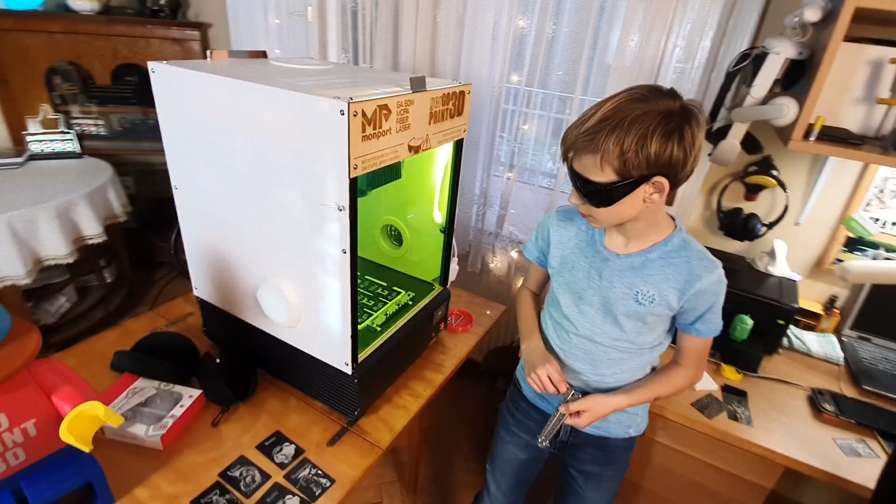You've seen the teaser, and now the project is here. We are diving into a multi-tool DIY build that mixes unexpected materials like repurposed election posters with 3D printing from our Sovol, FLSun, and Creality machines, alongside laser cutting on our large 600 by 600 diode and CO2 lasers.

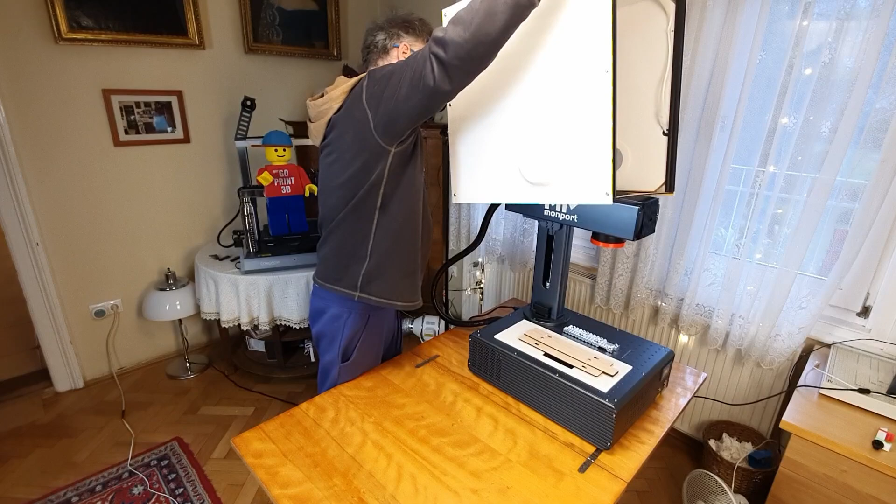The goal? To create a dedicated safety enclosure for our Monport GA60 fiber laser. Instead of buying a pricey commercial box that would increase its footprint, I designed a resourceful solution using affordable parts sourced from AliExpress. Join us as we walk through creating this enclosure, effectively trapping fumes and containing beams to make our powerful MOPA laser much safer to use.

Even if you don't own a fiber laser, you might pick up some fun and generally applicable techniques for using unconventional materials and combining different fabrication methods in your own projects.

Speaking of our laser adventures here on the channel, the Monport GA60 has already featured in a couple of videos. You might remember seeing it first in this video, which served as a tutorial guiding first-time users through the unboxing and initial setup, along with our first impressions of it. We then used it in a practical project featured in this other video, where we combined the GA60 for engraving stainless steel spice jar lids with our Monport Onyx R55 CO2 laser for the glass jars.

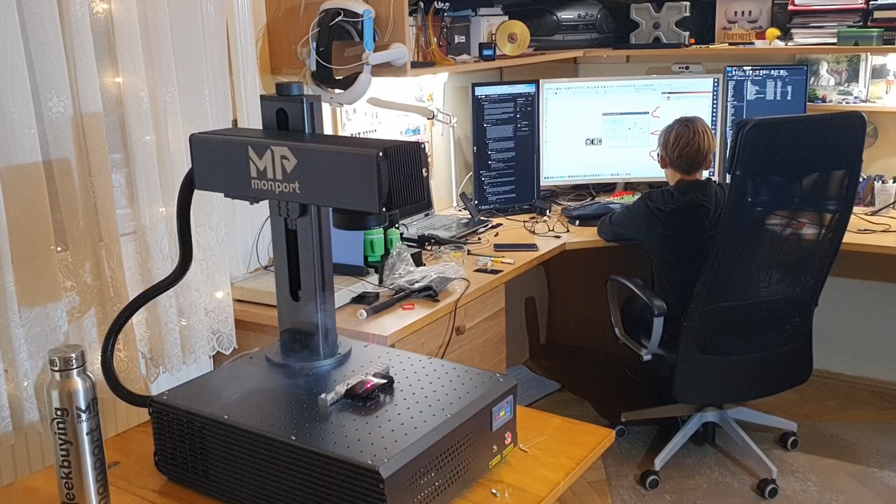So why did I decide to build an enclosure for the GA60 in the first place? Well, while fiber lasers like this do come with eye safety glasses, and you really need one for every person and pet that may step into that room, they typically arrive without any built-in ventilation and have a fundamentally open structure. That means effectively dealing with hazardous fumes and ensuring beam containment is completely up to you.

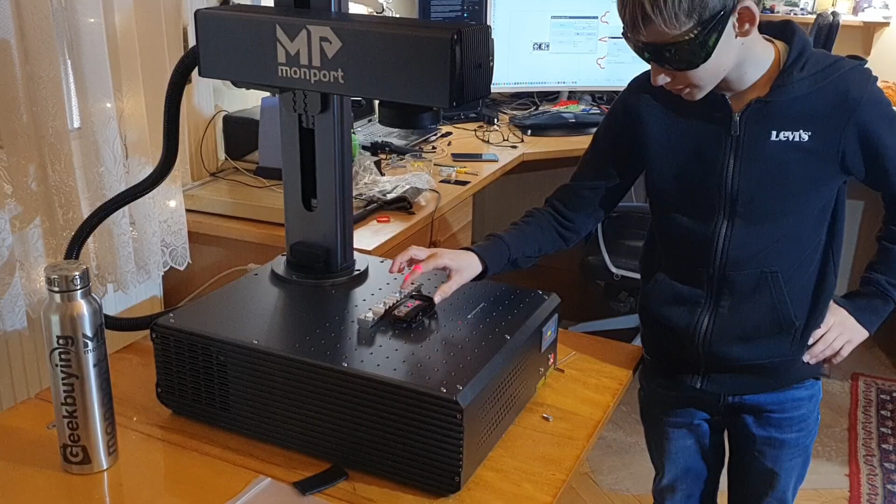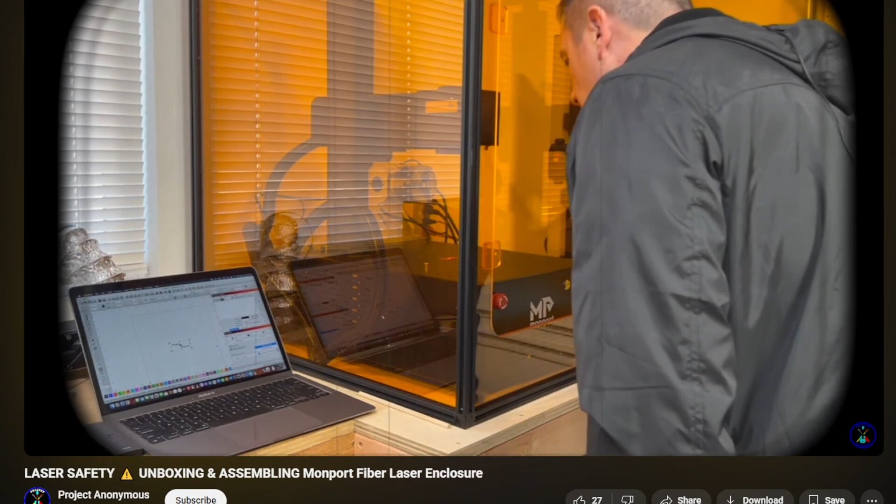I looked at commercial enclosures, of course, but I found they are often quite pricey, easily $500–600 or more, plus shipping. Beyond the cost, they usually wrap generously around the machine, drastically increasing the overall footprint, at least doubling or tripling the space needed. They also tend to use expensive colored safety plexiglass all around, adding unnecessarily to the price. And even then, you still have to buy and set up your own ventilation fan and ducting. For us, that didn't quite fit our needs nor our budget. So I decided to design and build our own custom solution.

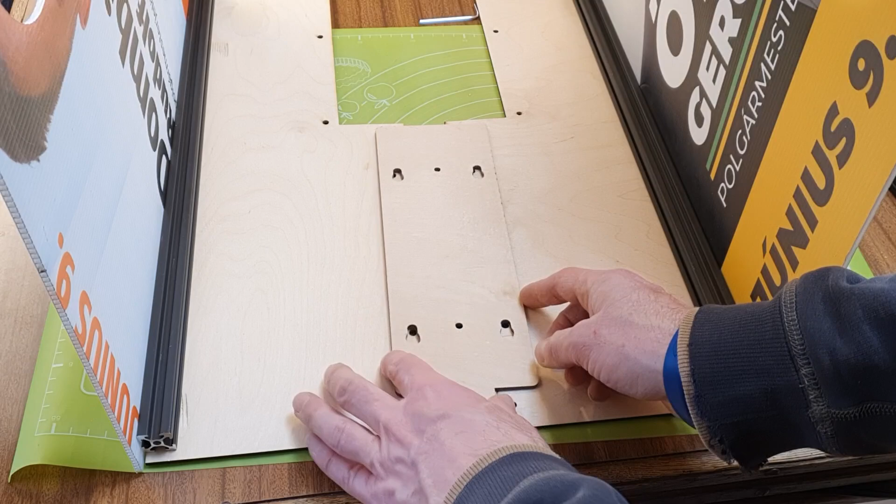By going the DIY route, I could create something that achieved essential safety, trapping fumes and containing the beam, but with some key benefits that were important to us. A tight fit that doesn't increase the GA60's footprint. Full access to things like autofocus, flexibility with dual-side venting, and lightweight design. This build involved combining laser cut panels with custom 3D printed parts designed to be printable on virtually any FDM printer using minimal filament, though getting your clearances right is important for assembly.

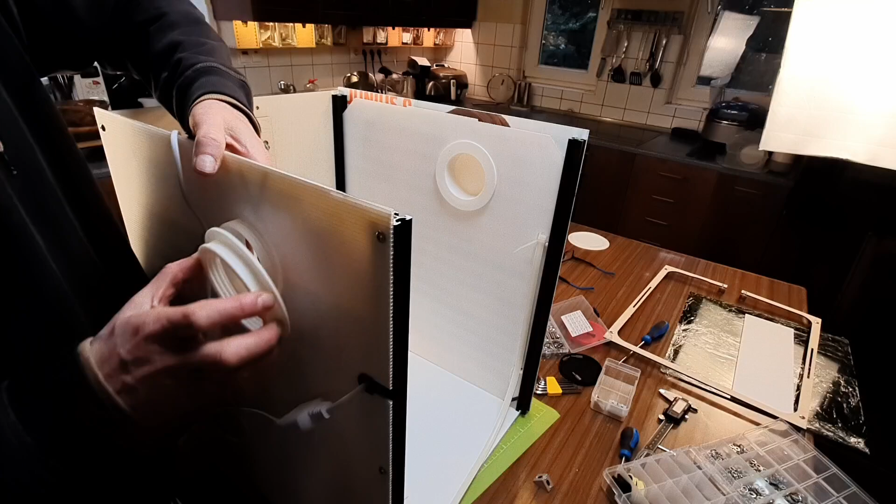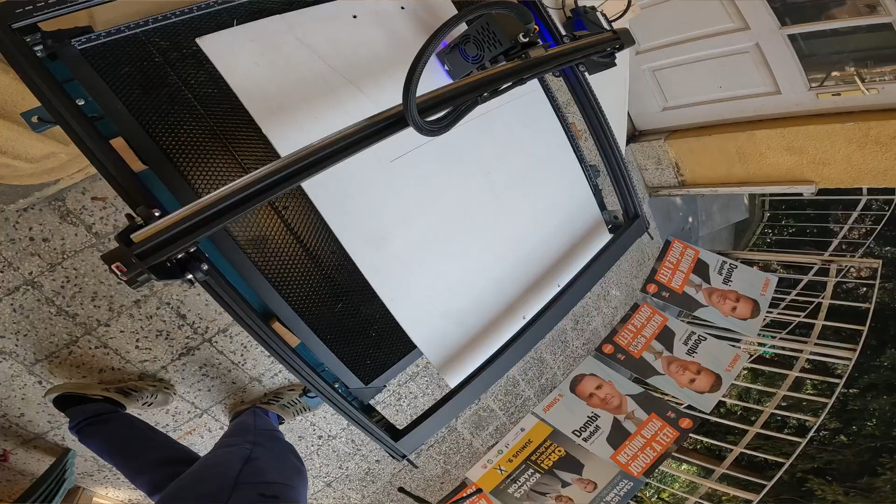And of course, cost was a major driver. I estimated the main components and materials came in around $100–120, a massive saving compared to those commercial options. Just note, this price doesn't include the inline fan or exhaust hose, because commercially available enclosures typically don't include those either. As for the time, assembly took us about 2–3 hours after everything was cut and printed. My large diode laser spent about an hour laser cutting each of the 7 main panels, but honestly, these could also be hand cut if you're up to a bit more effort.

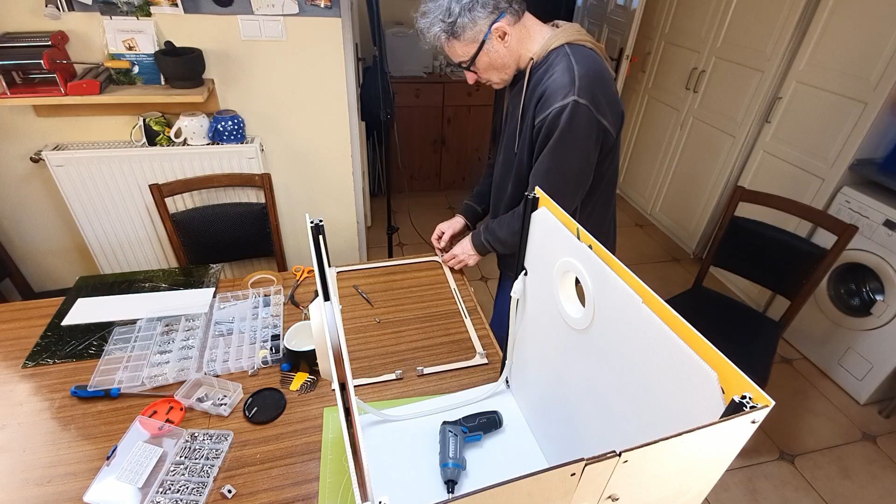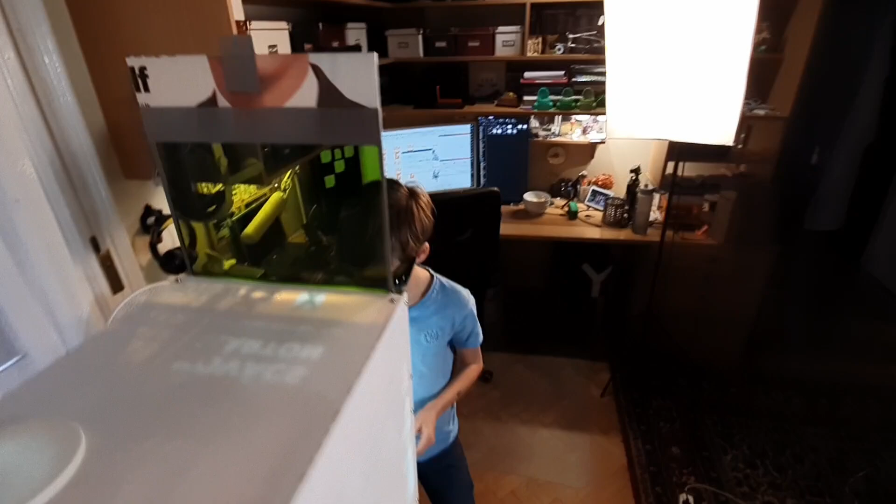So what exactly do you need to build this enclosure? I started with materials many DIY workshops might already have lying around. The largest volume material was corrugated sheets, repurposed from old election posters I collected after the elections last year. Basically free. I doubled up these sheets for the walls mainly to try to hide the poster graphics, though you'll actually see later that with the light inside, they will still show through a bit. It's actually nice to see opposing parties work together for safety here.

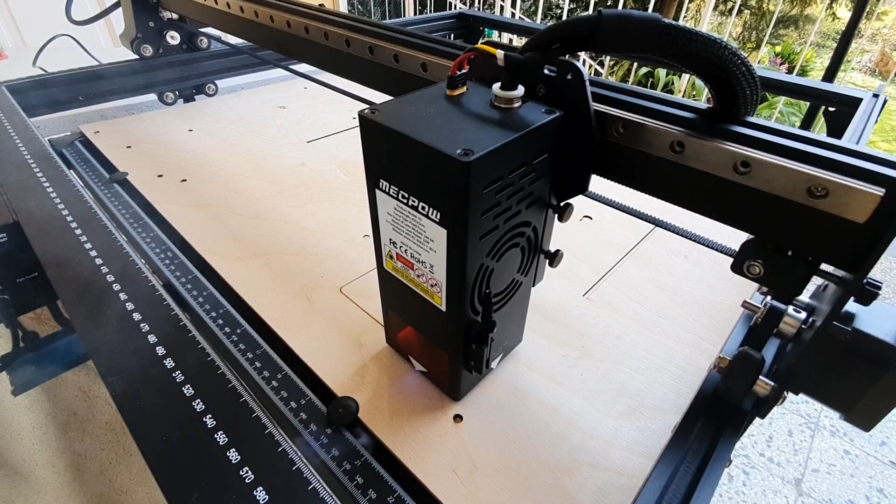As an alternative to the corrugated posters, you could easily use thin plywood for these sides and top panels instead. If you use plywood, they are stronger too. You likely wouldn't need to double them up. I also used some thicker scrap 4-5mm plywood we had for the base, back, and front top frame pieces, and a bit of duct tape, another workshop staple, and under 300 grams of cheap PLA filament for the 3D printed parts I mentioned earlier.

And that covers a good portion of the build. For the structural components and features, we sourced everything from AliExpress. This included 4 2020 extrusions for the corners, about 20 corner brackets with T-nuts, and all the necessary screws. We also got a safety window, specifically polycarbonate for laser safety, a bright COB LED strip for lighting inside, and an inline fan for the crucial ventilation system.

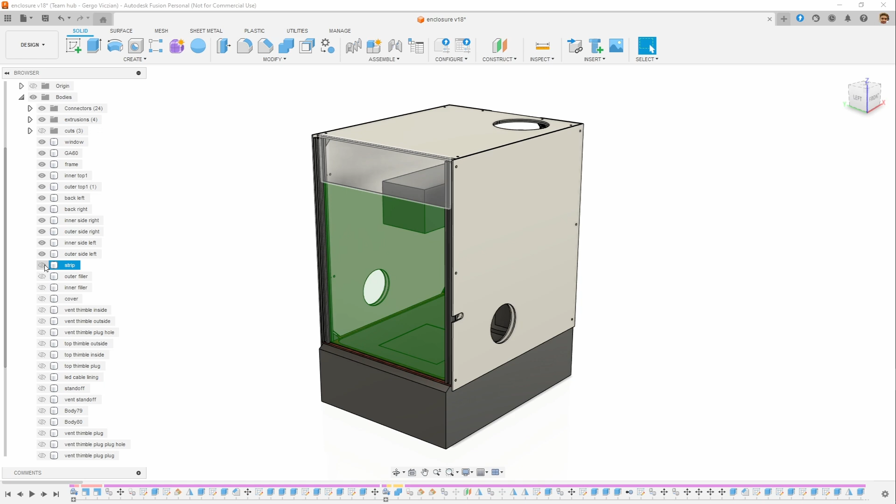Now about how this enclosure came together design-wise. As you might have noticed in some of the earlier background shots, the initial modeling and planning all happened in Autodesk Fusion. Laying everything out digitally and seeing how the components were supposed to fit together is one of the most satisfying parts of a project like this. From Fusion, it was over to Lightburn to generate the precise cut patterns for the main laser cut panels.

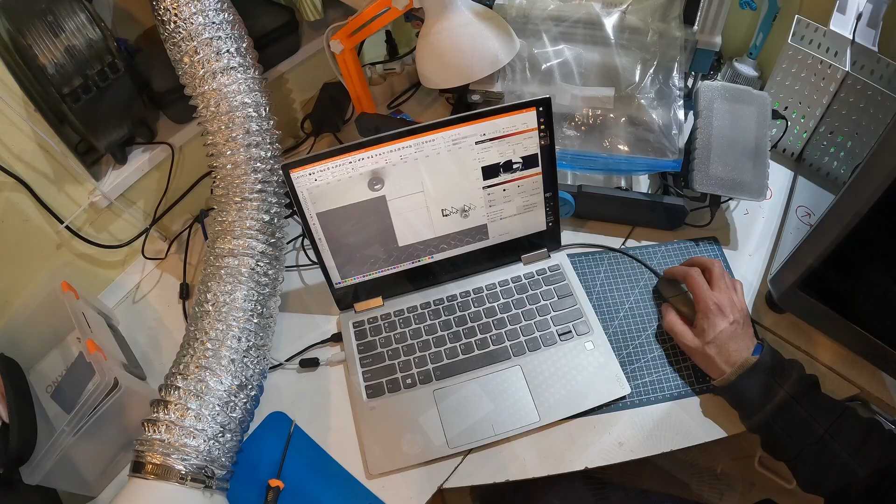Honestly, I was incredibly lucky. Almost everything actually fit perfectly right on the very first attempt in real life. There were just a few small components that needed minor adjustments during the assembly process, but thankfully, these didn't require recutting or wasting any material. And of course, I've made sure to update the published models with these necessary tweaks. So if you're looking to build this yourself, all the design files are available for you.

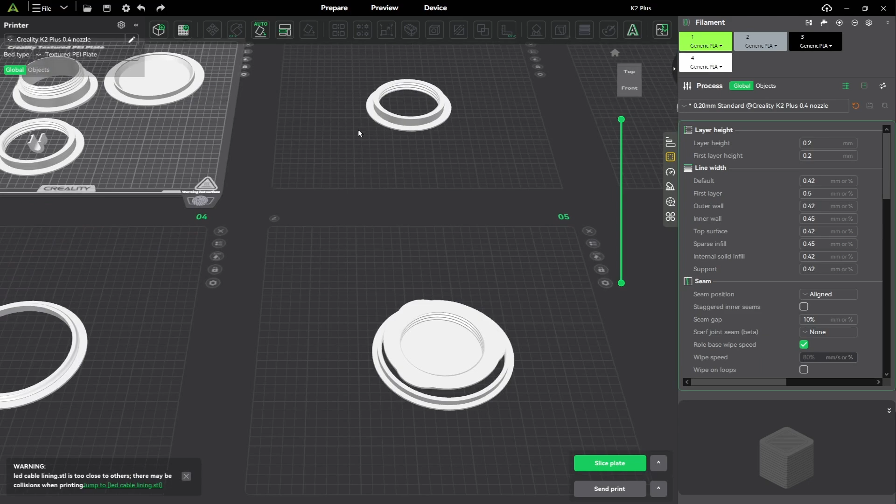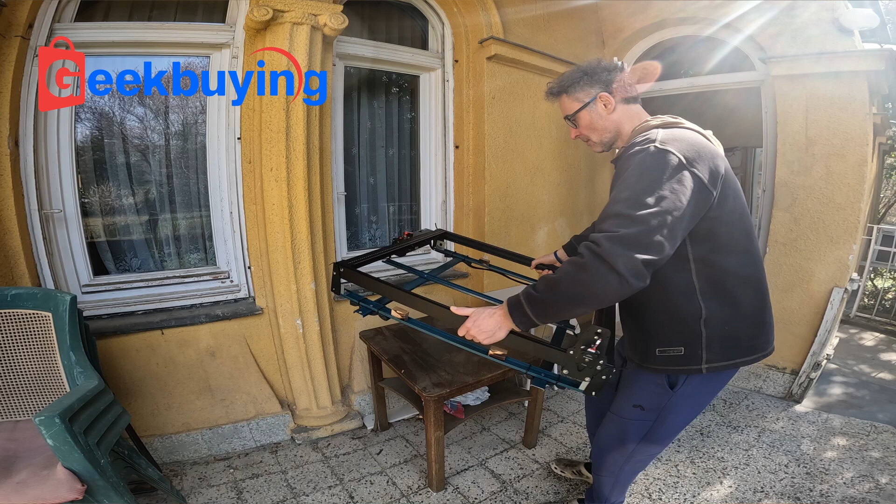First up, preparing the panels. I cut the main pieces on our large 600 by 600 millimeter Mecpow X5 22 watt diode laser, that open frame machine from geekbuying.com that we usually use out on the porch. Our review video covers this laser in detail if you're curious.

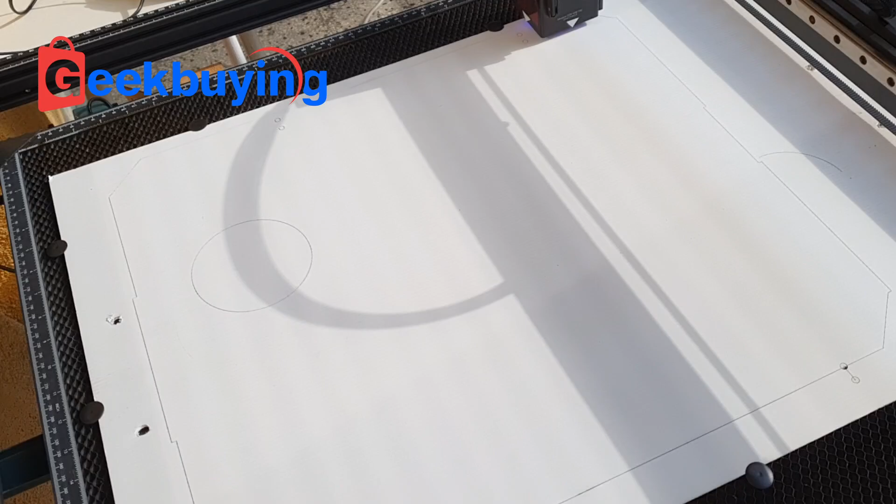Cutting corrugated plastic like these election posters was actually pretty tricky because of the double layer and the vertical walls inside. It really needs very slow, quite high power passes. And a super important tip here is to use your air assist at its highest setting to stop those plastic fumes from fogging up your lens. And this material is likely toxic, so ventilation or fume extraction is really essential.

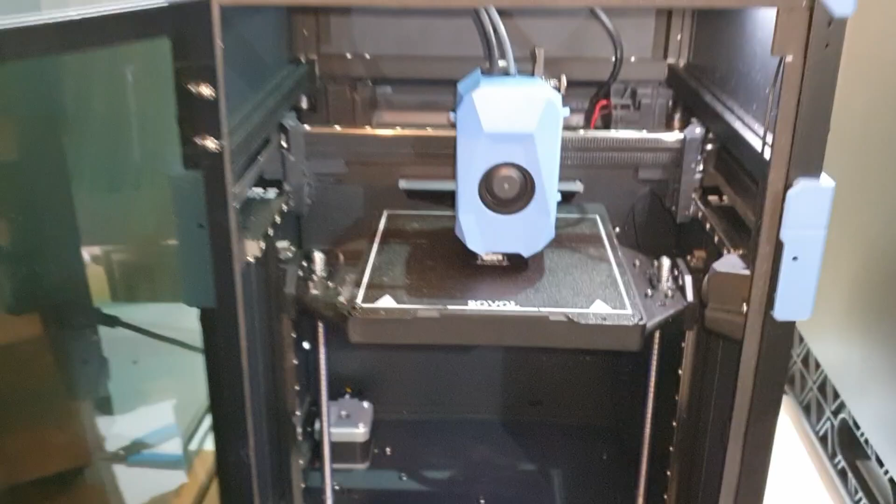While I was laser cutting those panels, I was also fabricating the 3D printed components in parallel. These included pieces like the venting duct adapters or connectors, spacers, and cable lining. I initially tried printing the adapters on our Flsun S1 Pro. Man, that printer is incredibly fast. My review covers this unique Delta Motion machine if you want to check it out.

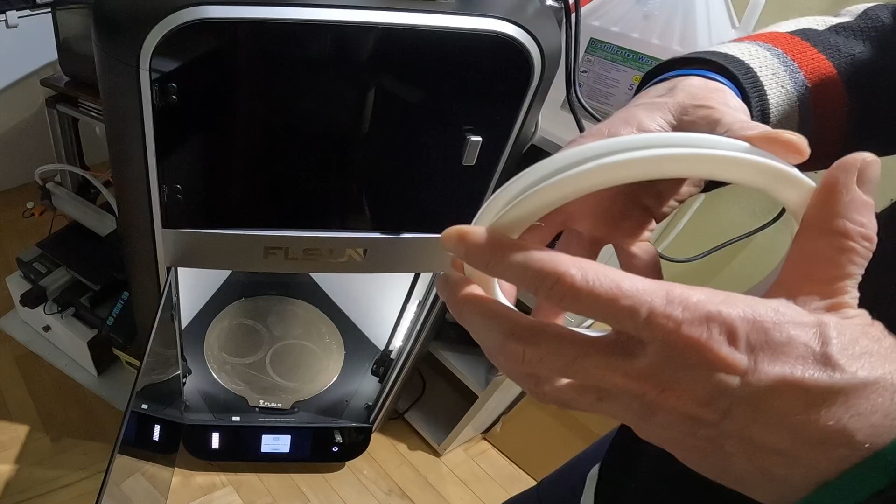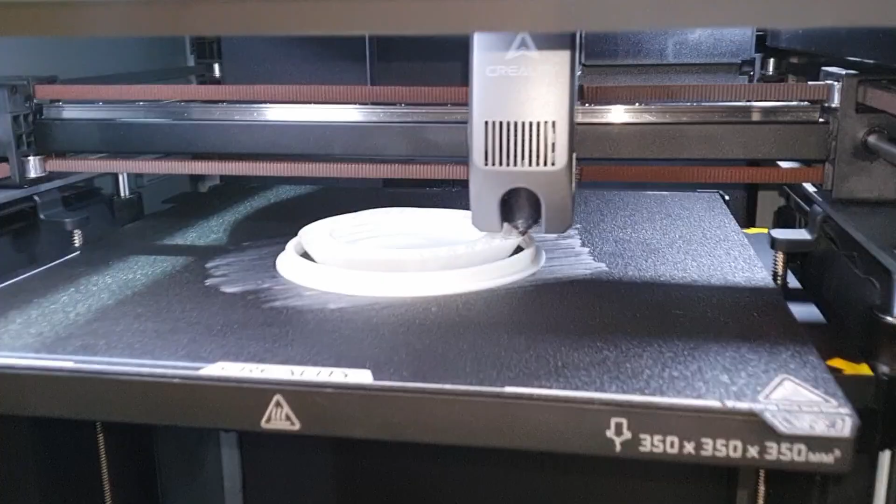However, these initial prints had some clearance issues. While I tried my usual boiling water trick to help them fit in a softened state, the best path forward was just to reprint them using the then new K2+. It just doesn't have the subtle dimensional accuracy challenges sometimes intrinsic to Delta Motion systems like the S1 Pro. But honestly, you don't really need huge or fast printers for any of these parts.

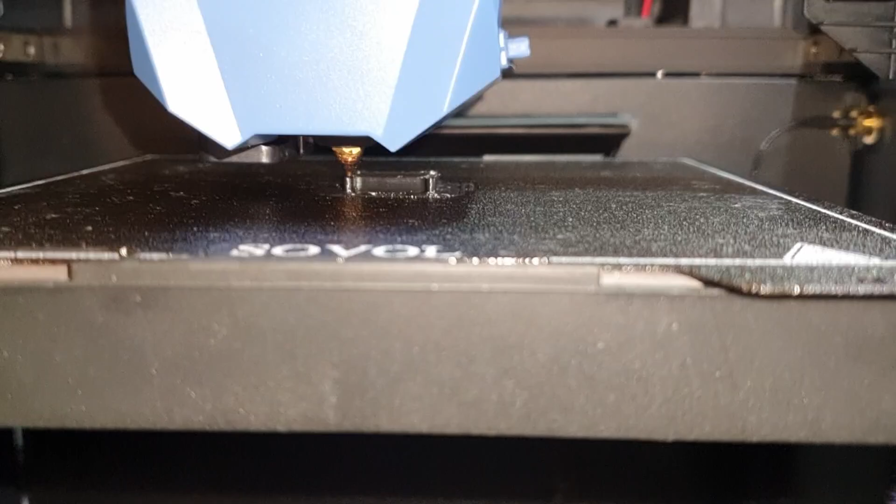And working in parallel for the smaller pieces like the spacers and cable lining, I used my new favorite assistant printer, the Sovol Zero. Its tiny build volume and quick printing speed are perfect for these smaller jobs, making it my go-to for those kinds of side tasks present in any complex project. I reviewed this little workhorse about a month ago if you missed it.

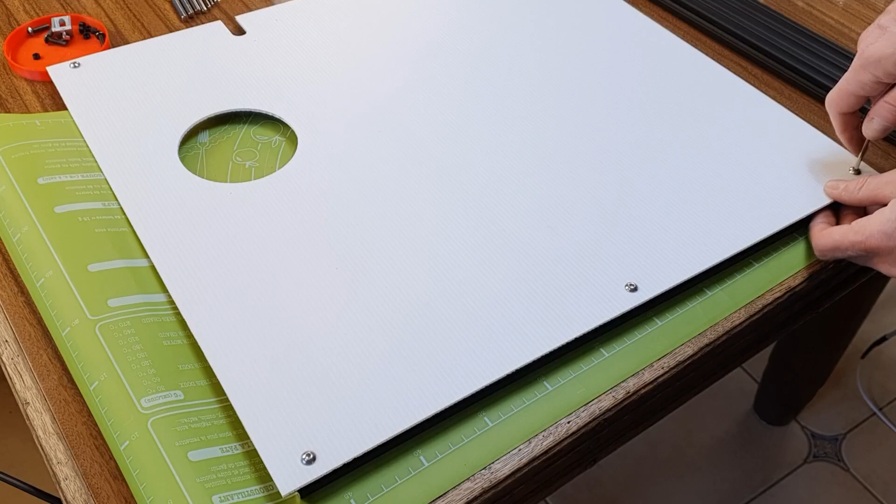With all the parts cut and printed, it was time to put everything together. Assembly started by building the side panel assemblies using 3 M5 screws and T-nuts on each side to secure 2 of the corner extrusions to the panel. I then connected the right half of the 3-piece rear panel to that side assembly. Of course, I did exactly the same for the left side.

Then I could add the third piece with the special locking mechanism in the back to connect the 2 halves of the rear section. This is necessary to work around the fiber cable, which of course cannot be disconnected to install the enclosure. We drive these 3D printed spacers onto the M5x20 screws with the Hoto electric screwdriver. These slide into the keyhole slots I cut in the middle piece of the rear panel, creating a simple yet effective locking mechanism to firmly hold the 2 sides together.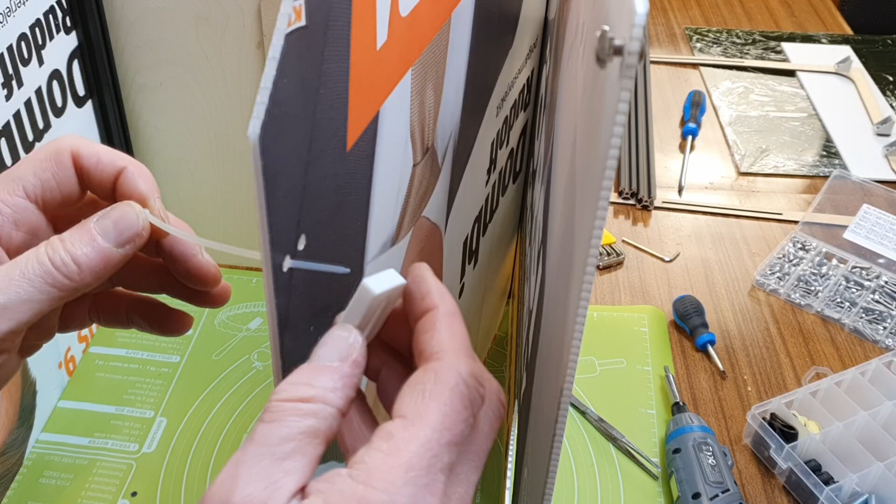Next, I started installing the internal side panels and features. This involved securing the LED strip to the inner piece of the doubled up side panels, using zip ties to hold it in place, and then adding the 3D printed LED cord lining to keep the wires tidy.

After that, I slid the inner walls into position, facing each other, and made sure everything was properly aligned before adding the top. Adding the top panels requires installing the corner brackets first. I quickly discovered the alignment protrusions on these little brackets were in the way and had to be sanded down to fit cleanly, which was easy enough to do with the precision rotary tool HOTO sent us recently.

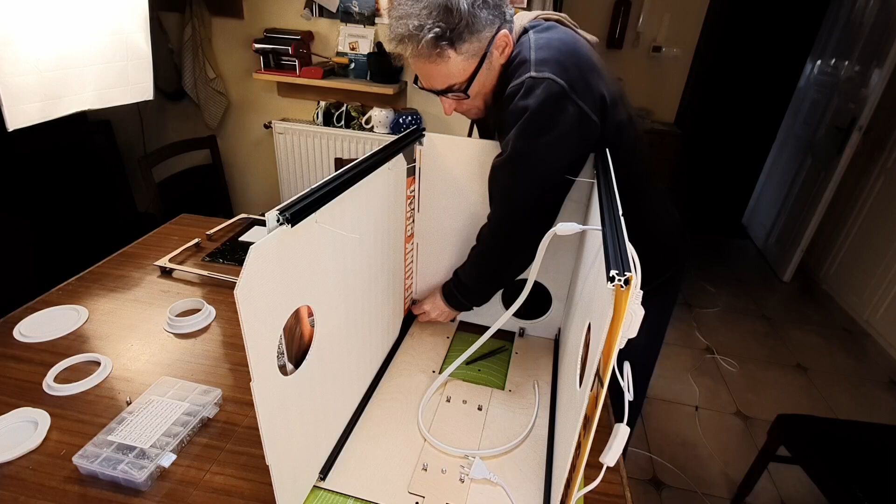Once the brackets were on, adding the top panels was next, which was a little tricky due to the tight angles for accessing some of the screws. After the main top structure was in place, I installed the venting duct adapters, placing the open one on the right side where our ventilation would connect, and placing the covered one on the left side, which makes our design future-proof and allows for having the ventilation from the other side later, if needed.

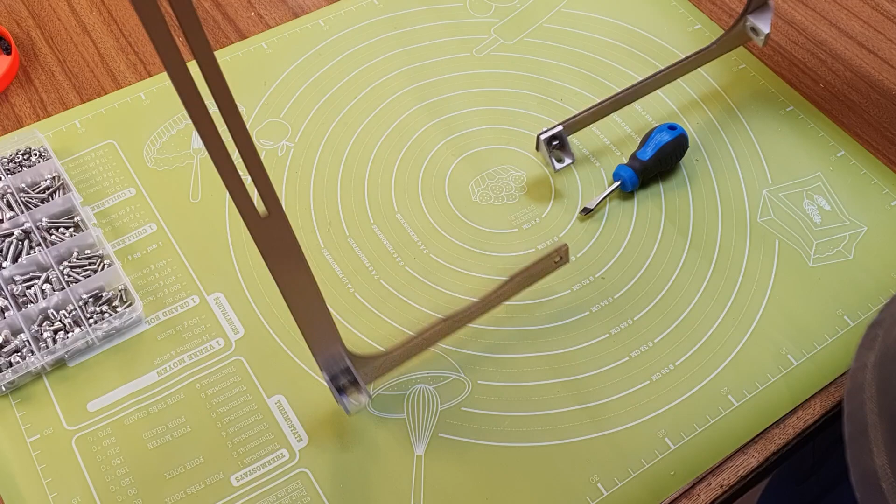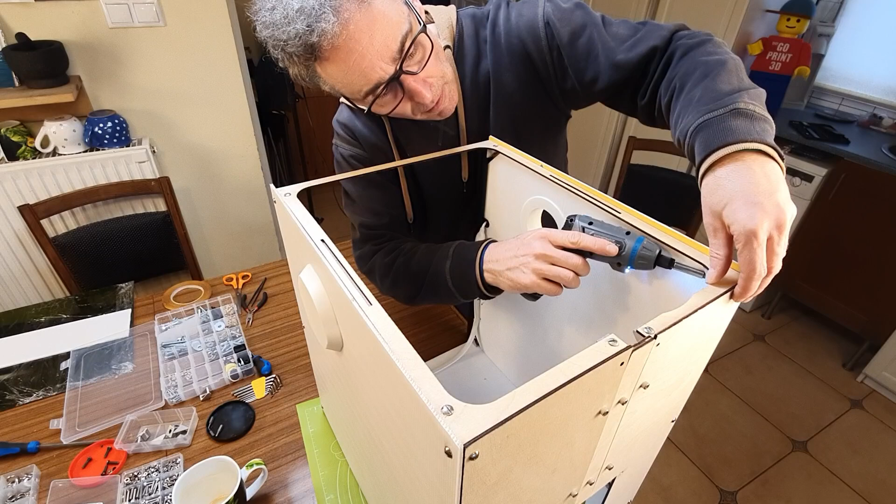With the upper assembly largely complete, it was time to mount it onto the base frame. This base frame is thin, but being cut from the same 4mm plywood as the back panels, it gives a bit of stability to the still wobbly structure at this point. Mounting it on the base frame also starts with attaching 10 corner brackets similar to the top. I noted that these also had the same alignment protrusions that needed a quick sand with the HOTO rotary tool. Once the brackets were in place, I carefully lowered the upper assembly onto this base and secured it using the bottom brackets and the final set of M5 screws.

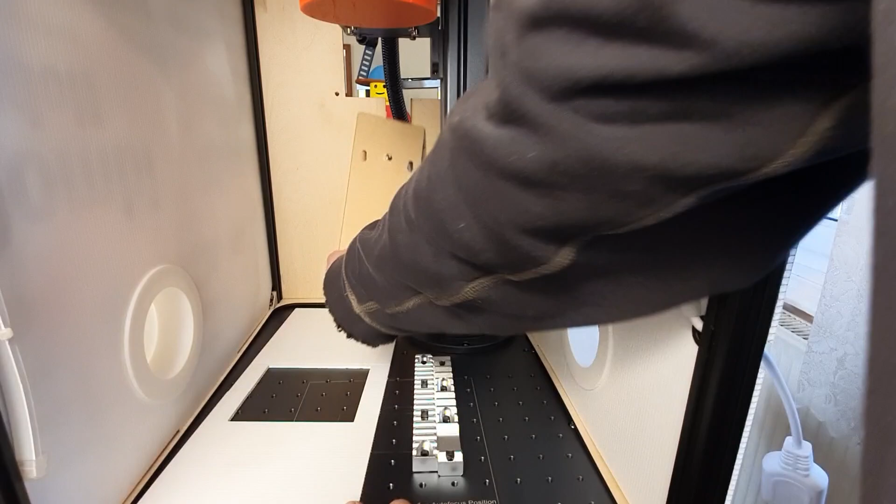Finally, it was time for the moment of truth, installing the completed enclosure onto the Monport GA60 itself. I carefully lifted the enclosure and positioned it over the laser unit. I secured the back section and then had to do a little fine-tuning on the sliding back cover to get a perfect fit around the back of the laser arm. That definitely took a couple of takes to get just right.

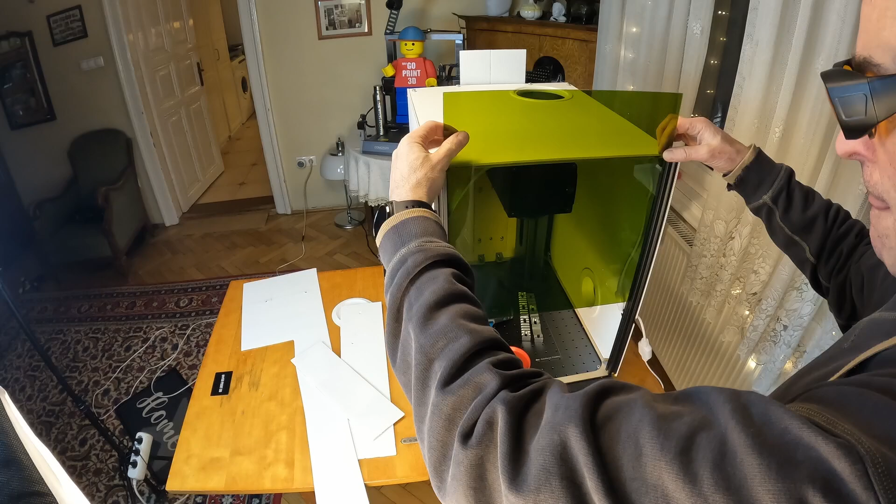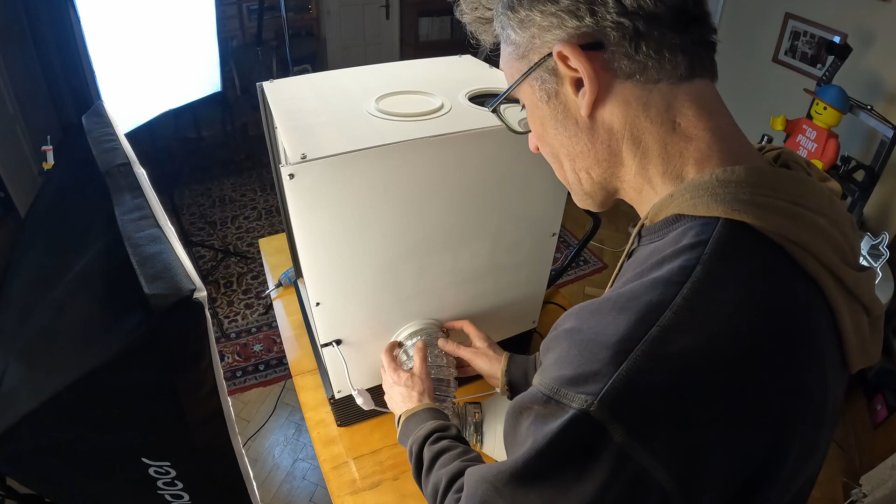The last structural steps were adding the safety window into the front panel. It slides neatly into the grooves of the front 2 extrusions. This was one of my early visions for this project. And then connecting the inline duct fan to the venting adapter on the right side. I also added a simple window stop mechanism, just a drilled hole and a long screw to prop the window up when opened.

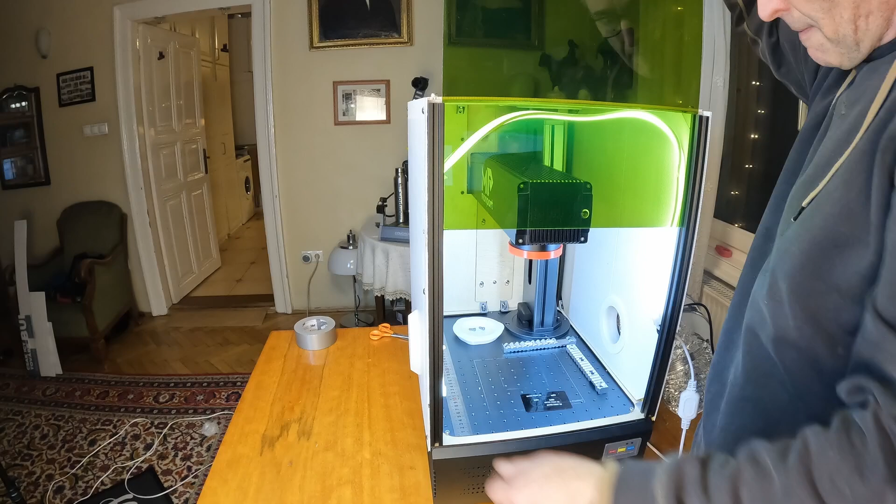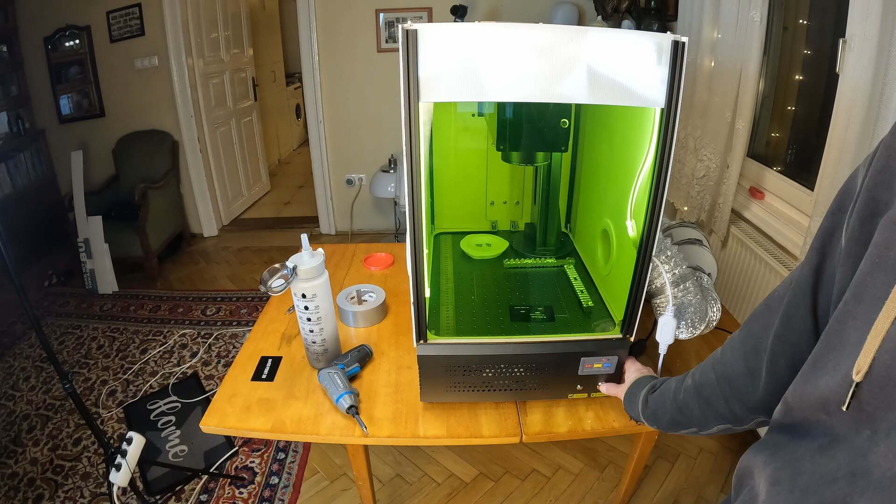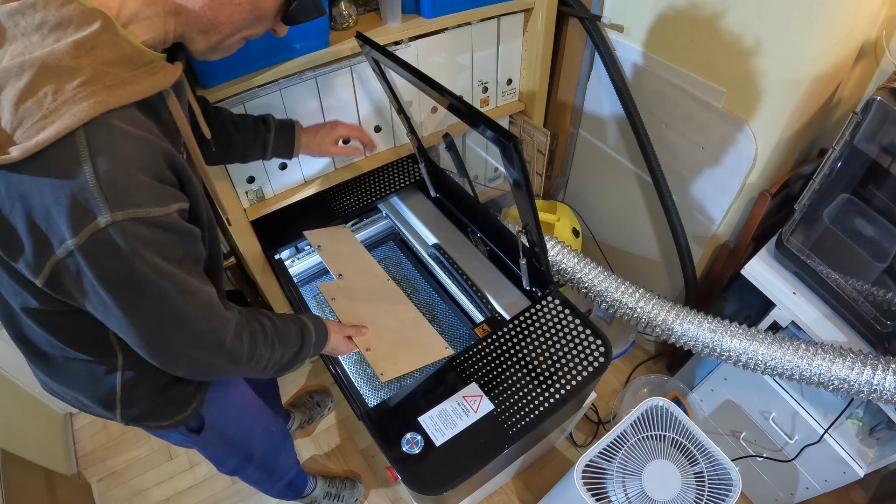After getting the enclosure built, I ran into a couple of adjustments I needed to make. First, I found that the opening on the rear panel didn't quite allow the laser arm to go low enough for the autofocus to work correctly. Fortunately, this was a simple fix, easily done by slightly trimming the back panel pieces. We only needed to add about 15 millimeters to the range of motion.

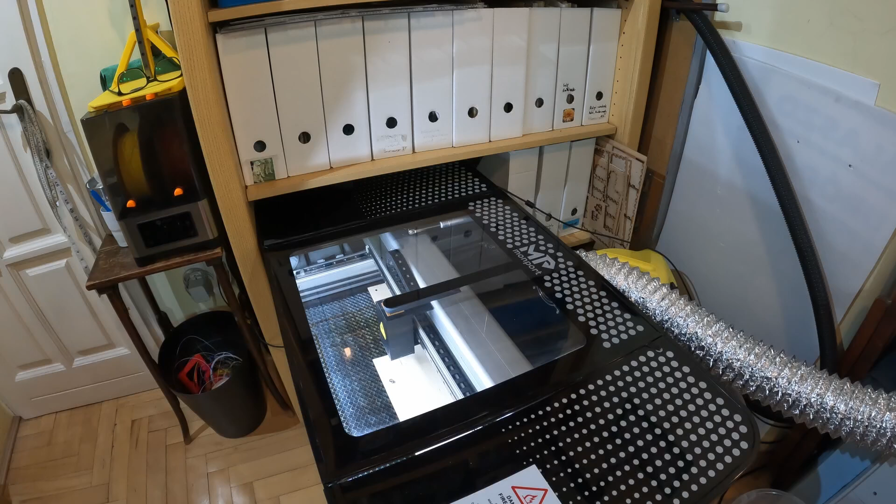Since I already packed away the MOPA, and it was getting dark and cold on the porch, I was really happy to have the enclosed Monport Onyx R55 CO2 laser right here in the workshop. It's great for cutting plywood, and these rear panel pieces fit perfectly into its smaller work area. Its camera was also a huge help for making precise adjustments to these existing pieces.

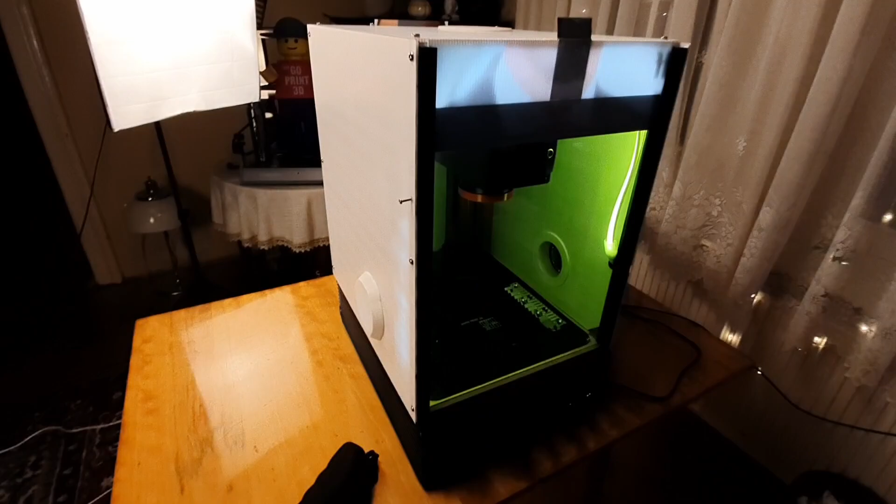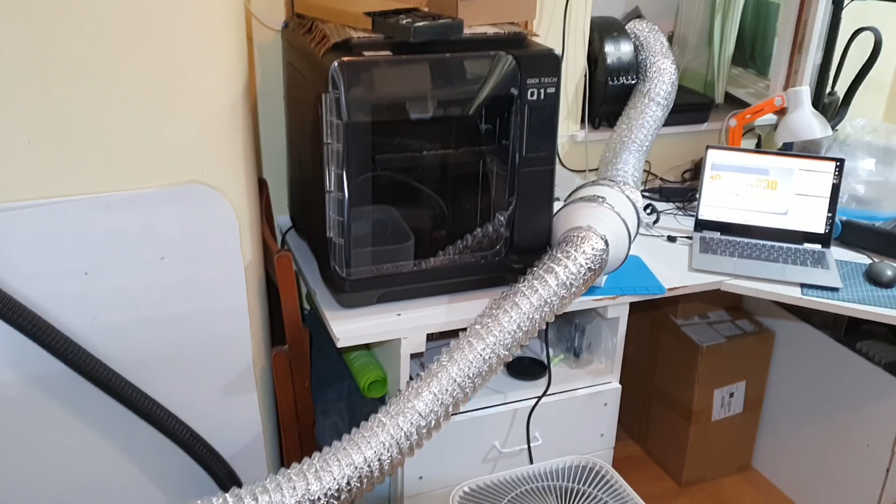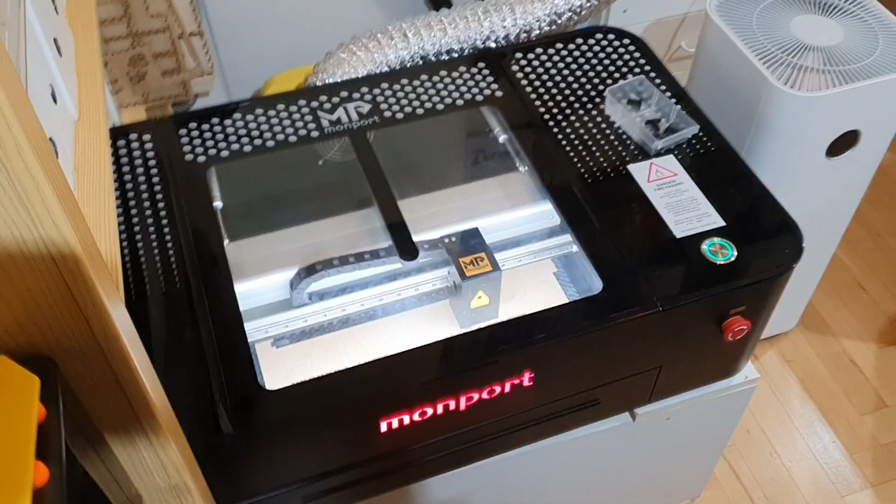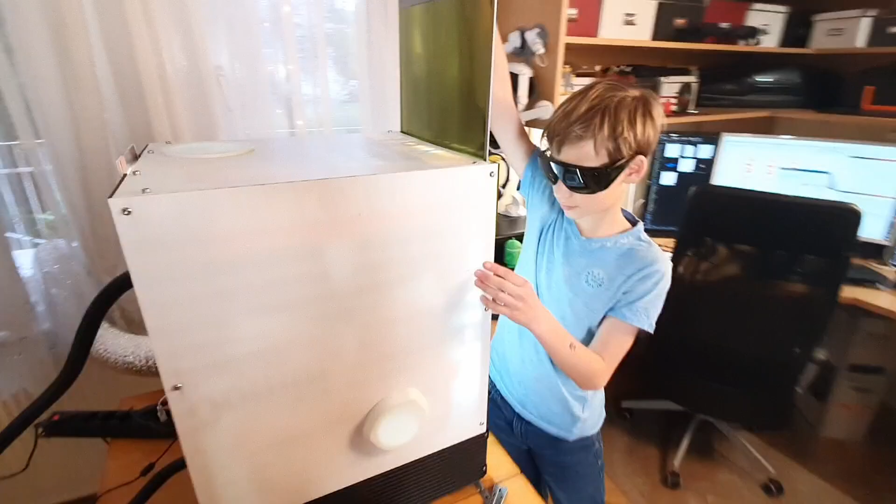Initially, I actually hadn't designed to add a front top panel over the safety window, even though the colored plexiglass I got from AliExpress was slightly shorter than the total height of the enclosure. This was another small piece that fit easily into the Onyx R55's work area, and I appreciated its camera-aided ability to precisely cut the piece from a scrap of wood, only slightly larger than needed. As you might notice, I took the opportunity to also engrave logos and some warning text onto this panel, which will lead us right into the next important chapter of this video about my concerns and some disclaimers regarding this project. Adding this panel strip to the top of the front of the enclosure greatly increased its stability, completely taking away that slight wobbliness it had originally.

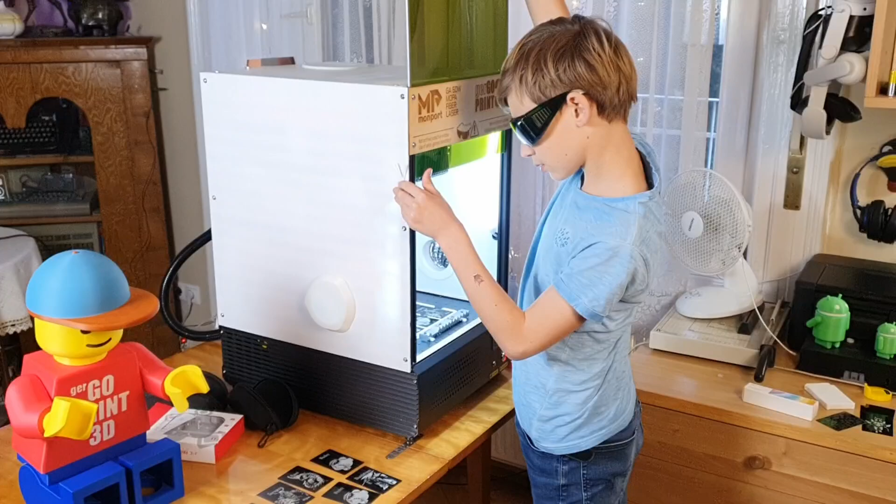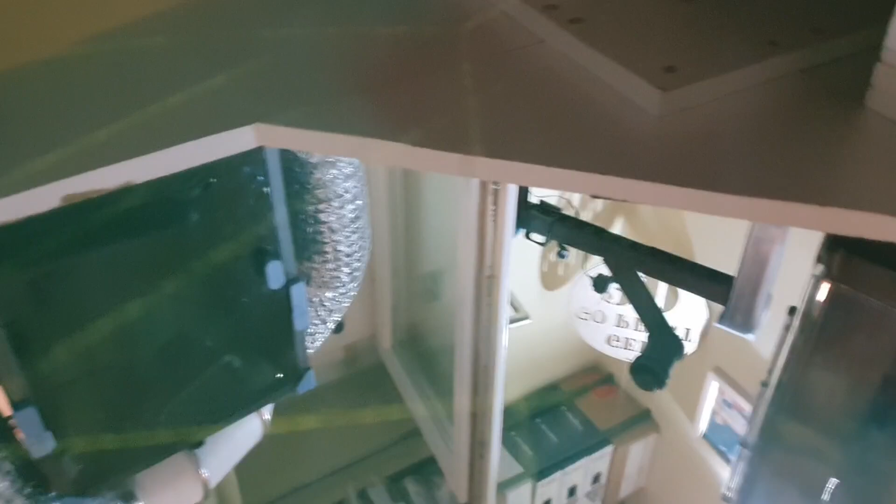But before we get to those disclaimers, there was a pretty significant design flaw I really wish I had thought of and fixed earlier. The safety window is made of polycarbonate, which is easily scratched or marked by other plastics. The way I designed the top, the edge of its plastic panels could actually rub against the safety window as it was moved up and down when opening it. I'm not totally sure if it's really scratching or just marking, but after just a few times opening and closing the front window, it had gathered a good number of scratches or marks I haven't been able to remove with any solvent or polishing method I've tried.

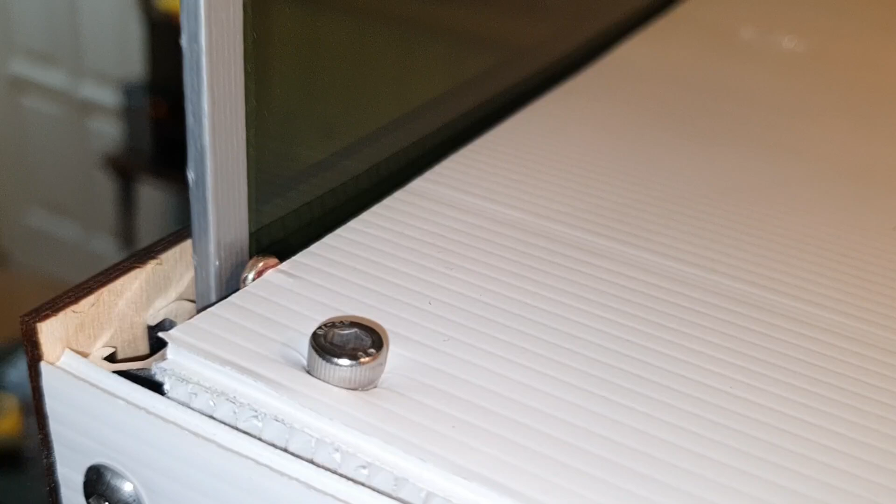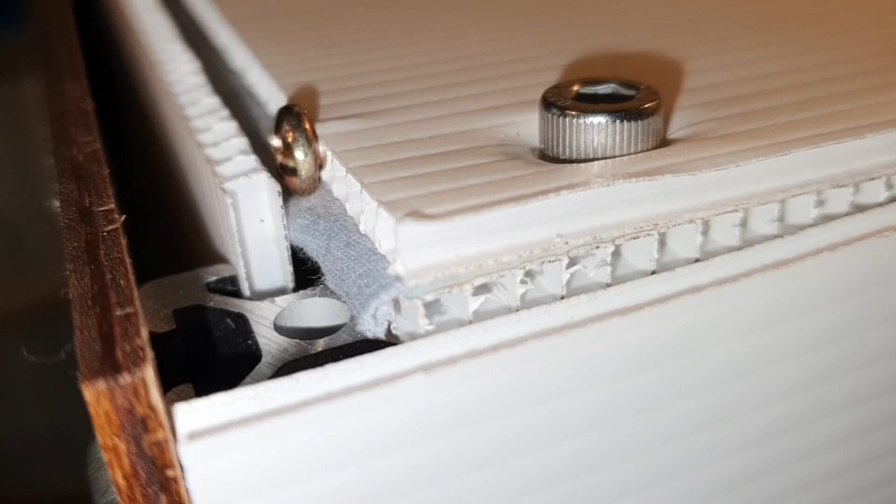My workaround was to add 2 screws, one on each side, to push the window away from the edges of the top panels. The screw heads might scratch the window as well, but it's much less of a problem right on its very edges. An even more important addition was a piece of silk fabric along the edge of the top panels to create a smooth contact with the window.

Be sure to add these before you ever slide the window in. And now let's talk about some of my potential concerns regarding the enclosure, as sort of hinted at by the warning text on the front.

Although it features what's advertised as a laser safety window, which I specifically purchased for the 1064 nanometer wavelength of my fiber laser, the piece of colored plastic I received did not come with any certification. It's from a company that seems to specialize in making laser safety equipment, but they don't appear to be certified in the EU or USA or any other major markets, and there's no marking on the window itself. While it probably adheres to the OD6 Plus protection level they sell it for, I personally would not fully trust it with my eyesight alone.

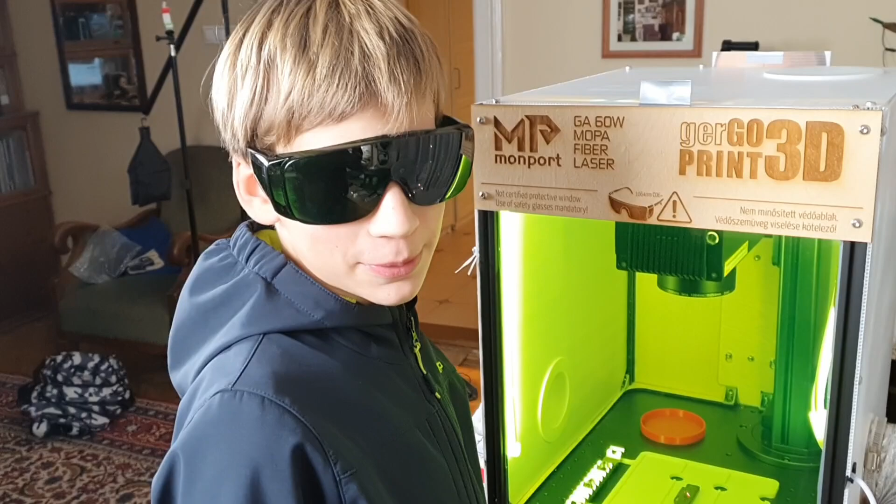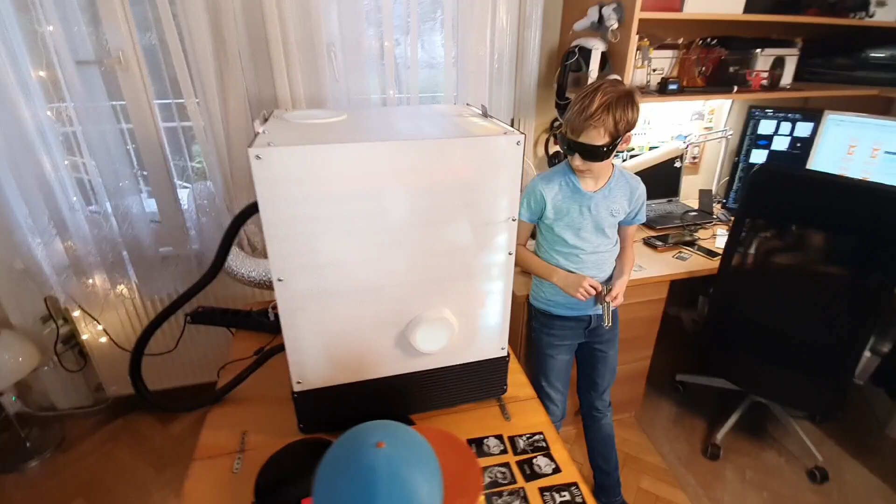So we've gotten into the habit of still wearing our certified laser safety glasses when the laser is operating. This is even more important since I haven't done any research or have any information at all about the laser blocking ability of the corrugated plastic panels either. They definitely let visible light through, so I'm not sure if they diffuse the laser beams enough to become harmless in case of a reflection. Better safe than sorry, so the safety eyeglasses stay on.

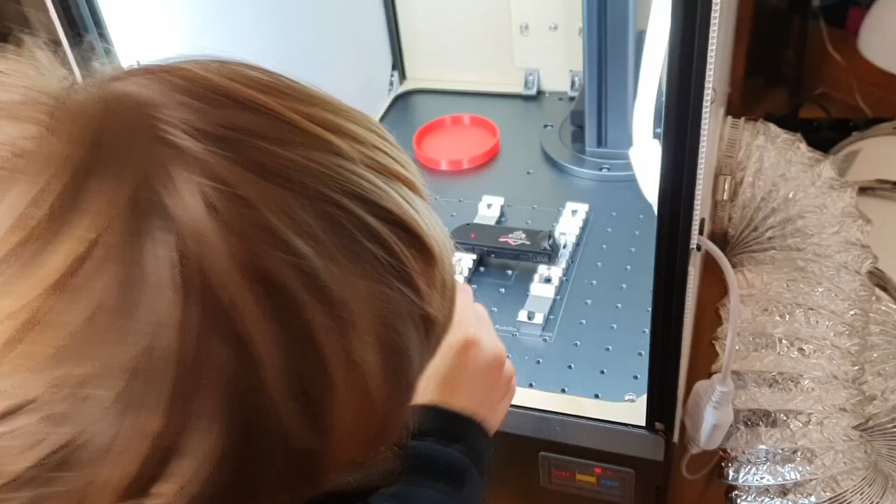I have just a few last points which are less critical. First, unfortunately, the LED strip I got does sometimes flicker on camera. Sometimes it doesn't, but I haven't yet figured out what causes this. So if you're planning to film your laser projects like I do for this channel, maybe look for a flickerless light source.

Second, Monport promised to send a rotary accessory for this laser, and I hope it will fit inside, but honestly, looking at pictures of the rotary tool, I'm afraid it might not. I'll definitely update you on that when it gets here and I can test it.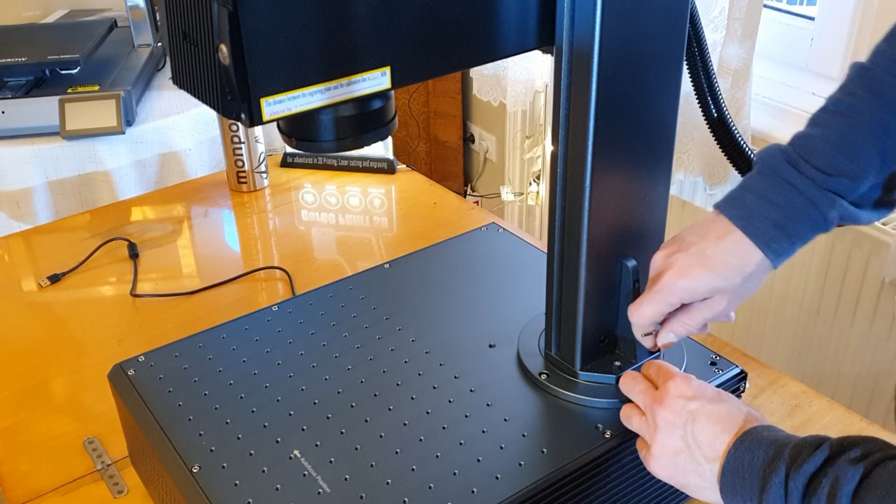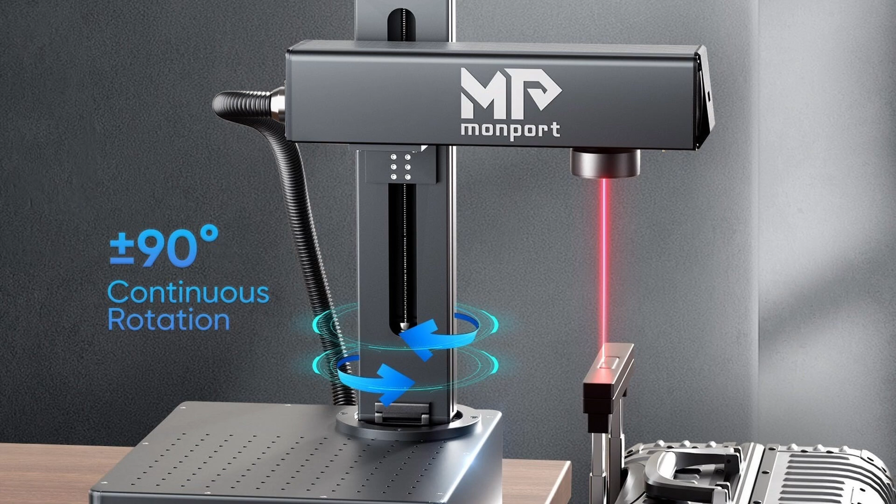Third, an interesting differentiating feature of Monport fiber lasers is their ability to rotate the laser arm to the side of the device to engrave or mark objects that wouldn't otherwise fit in the regular work area. With the enclosure on the device, we won't be able to utilize this feature. However, it is fairly easy to remove the enclosure, either for using the arm rotation feature or if that rotary accessory ends up needing the extra space.

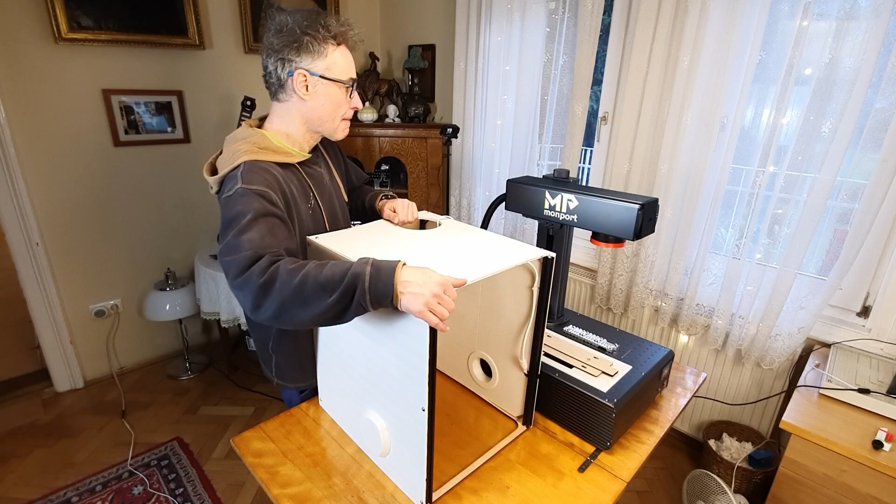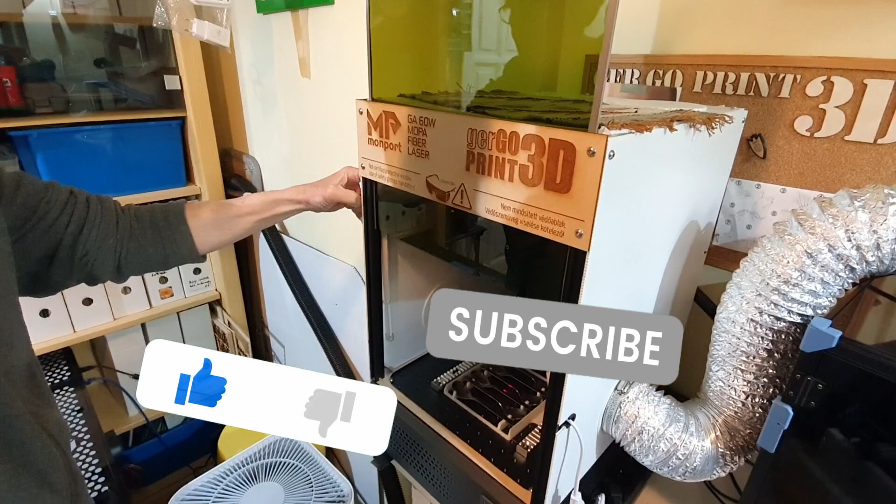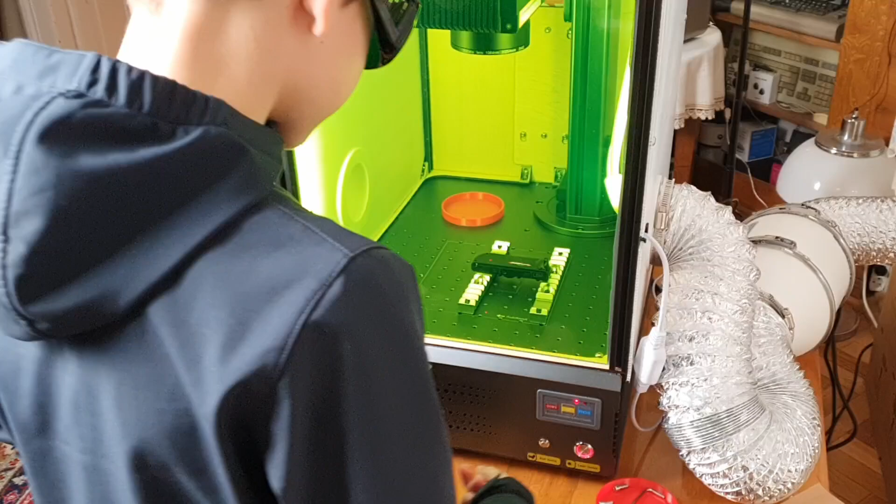So with this custom enclosure, the GA60 MOPA has truly found its permanent place in our little workshop. Being able to mark metal, plastics and other materials so effectively is absolutely key in a DIY studio like ours. The GA60 is powerful, versatile, and now with this enclosure, it's not only easier, but also much safer to use.